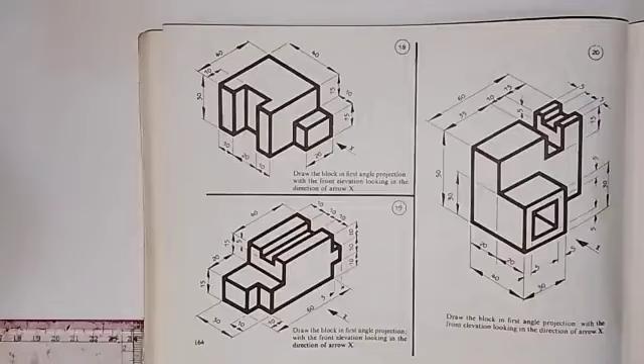Work on the construction of this isometric block. Though what we are asked to do here actually is to draw the orthographic views, I want us to look at how we can construct this isometric block as we can see it here, just to replicate it as it is given to us.

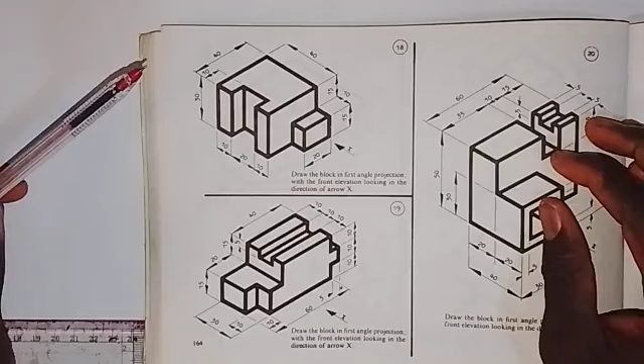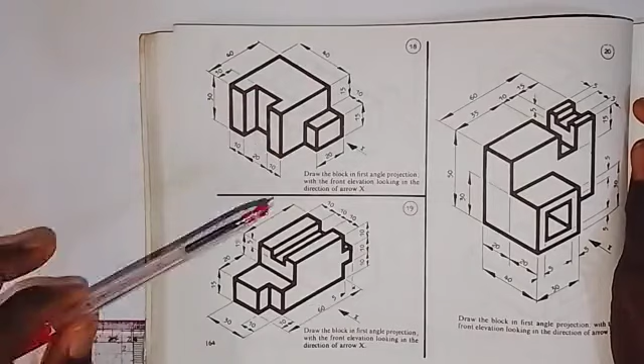So we have dimensions that we are to use, but what I'm going to do first is construct a block without this feature and without this feature. Then after that, I will bring out this feature, and I'll bring out this, and you're going to see how simple it is to construct this object as we see it here.

Now, so what I'm going to make use of from these dimensions here is this 40 millimeters as distance from here to here. I make use of this 40 millimeters as distance from here to here, and I will also make use of this height, distance from here to here, which is 30 millimeters.

So let's see how that can be done. What we are to do first is draw a short horizontal line. I will have it here like this. Okay, we have this. Then we are making use of our 30-degree set square, but I'm going to do something first by taking a point here, which I usually call the lowest point. So I'll call it point A.

Then with my 30-degree set square, I'm going to draw a line in this direction. From this point, I'll draw a line in this direction, and then I will come to this point and also draw a line in this direction. Okay, we have this. Then at this point, I'm going to draw a vertical line.

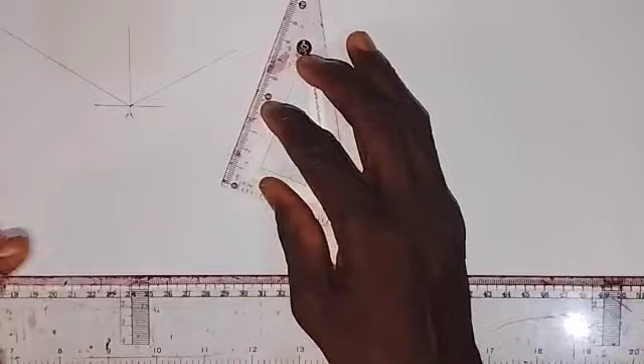So draw a vertical line like this, and I'm going to take the measurement as we have it there. So I'm going to take a measurement of 30 millimeters from point A up. So 30 millimeters up, this is 30 millimeters.

And then on this side from point A, I will take a measurement of 40 millimeters. So here is 40 millimeters here. Okay, then on this side from point A again, I will take a measurement of 40 millimeters from point A. So this is 40 millimeters.

So at this point, I'm going to erect a vertical line. I will erect a vertical line at this point. So here we have a vertical line up here, and then we come to this point here. We also erect a vertical line like this.

Okay, then setting my set square in this direction as we have it here, I'm going to draw a line from this point to where we have this 30 millimeters up from A. I will draw a line to touch this, and I will turn it this way and also draw a line from here to touch this line.

Then I will move to this point with the set square, and then I will draw a line in this direction. Then I will also turn the set square this way, and then I will draw the line from this point to touch this. Okay, so we have this block now.

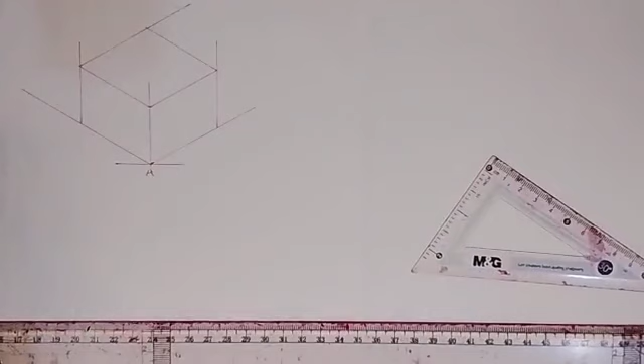So let's bring out the features that we have around this surface here. I mean this rectangle, this surface that we have here, and this, and then later we bring out this. So let's see how that can be done.

So what we are to do first, as we have here, we need to take note of the dimensions given to us. We have that from here to here is 10 millimeters, from here to here is 20, and from here to here is 10. So let's take that measurement.

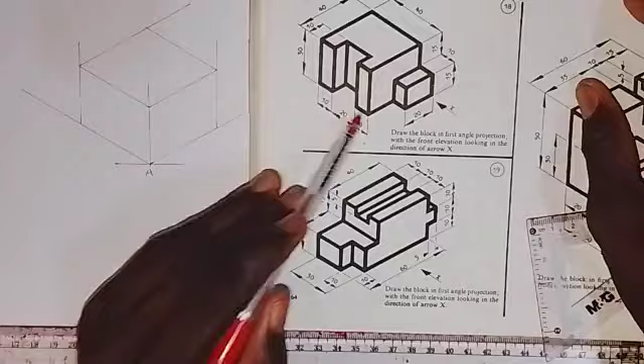So I'll come to this point here, take a measurement of 10 millimeters from here inward, and then I have 20, so the rest is 10 millimeters. So I'll come to this point here.

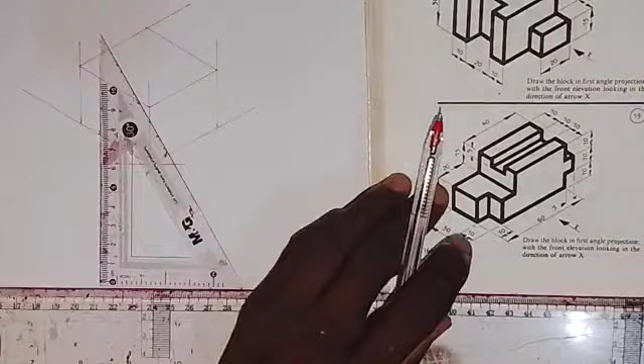So at this point, I'm going to erect a vertical line. This vertical line that we have here, I'm going to put it at this point. So we have it like this.

Okay, then we also have this vertical line that we have here. So I'll come to this point and erect this vertical line from this point up.

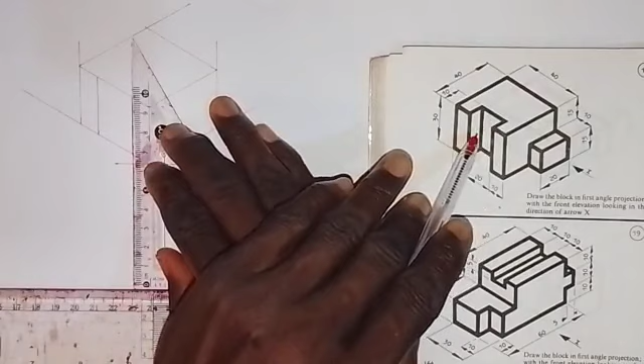Okay, so now we need to bring out what we see here. For us to bring out this rectangle and this surface here, there's something that we need to do. So we need to come up here with the set square, and then we are going to draw a line from this point inward like this, and then we come to this point.

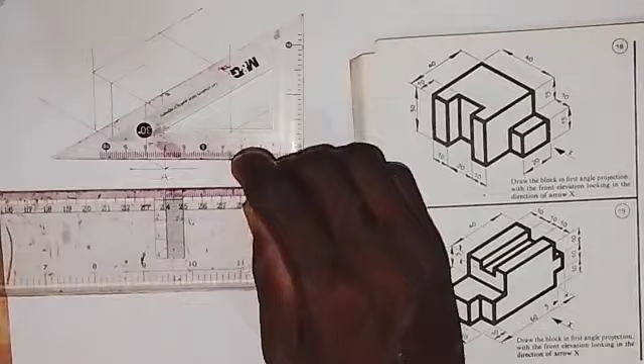We also draw a line inward, and then looking at what we have here, we are told that distance from here to here is 10 millimeters. So we have to take that measurement. I'll just come here and take a measurement of 10 millimeters from this point inward. This is 10 millimeters.

Okay, so at this point, I'm going to transfer this distance or this measurement. I'll transfer it to this side, so it goes like this. So we have this now.

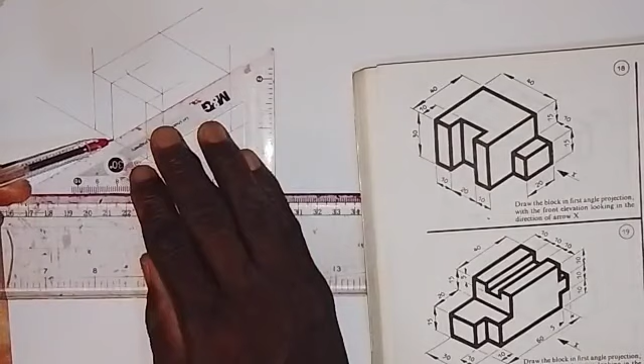So now I'll come down here at this point. This line that we see here, we draw it inward like this. Then from this point, with that 10 millimeters we just took, we draw a vertical line to touch this line, and then this line we have inward, we draw from this point to touch this line. So we have this now.

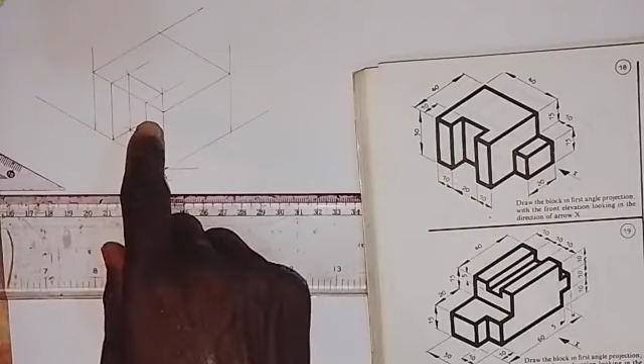So this feature we have here, you can see everything has been placed on this block. Now let's bring out this particular feature, this block we have here. The dimensions on it: from here to here is 20 millimeters, from here to here is 15, and from here to here is 10. So let's start with that.

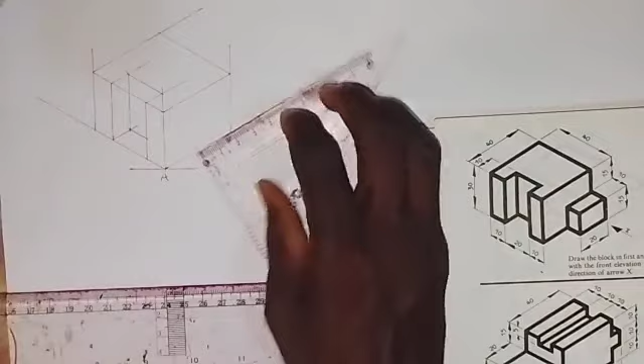By taking a measurement of 20 millimeters, from this point we take 20 millimeters in like this. Then at this point, we take 15 millimeters up. This is 15 millimeters here, so we have this will be 15 millimeters. At this point, I'm going to draw a vertical line.

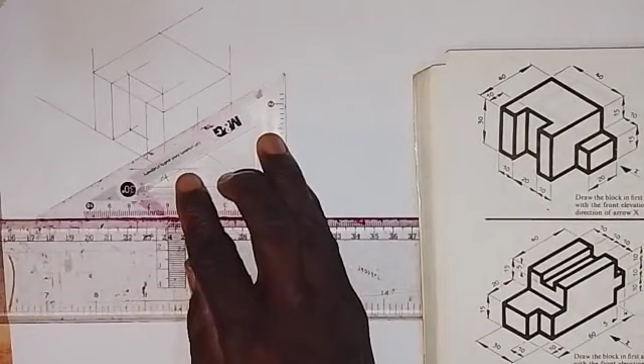At this point, we draw a vertical line up, and then we turn the set square this way and draw a line in this direction. Then we turn it this way, coming to this point here, and draw a line from here to touch this.

Then we come onto this line and take a measurement of 10 millimeters. From this point we take 10 millimeters, this is 10 millimeters. Then we set the set square this way and draw a line in this direction at this point. Coming to this point, I'm going to erect a vertical line.

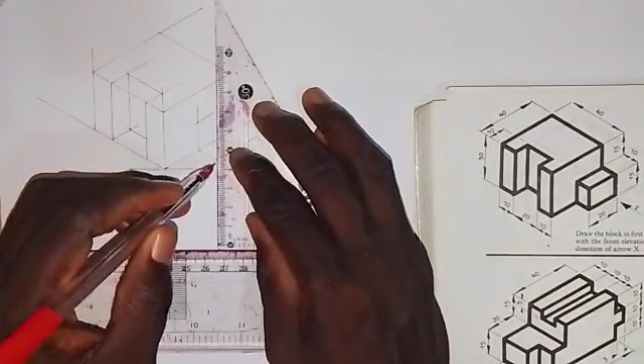So we have this. Then at this point, I'm going to draw a line from this point to touch this line like this, and then turn the set square this way to draw a line in this direction. Coming to this point, I'll draw a line to touch this line, then at this point draw a vertical line from this point to touch this line.

So you can see that the block has been produced here, as you can see. So now what we need to do is bring out the visible outlines and edges of this object to make it more clear.

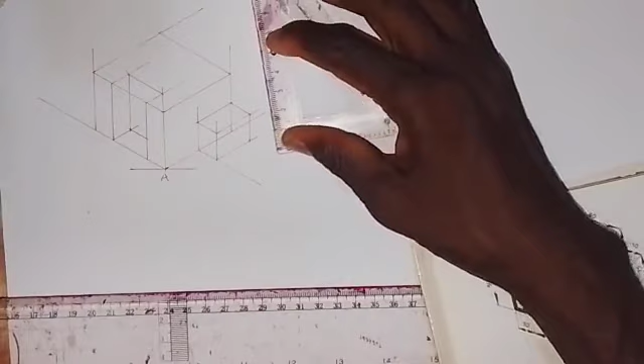With my black pen, which I use for my thick continuous line, I'm going to make this line a thick line, and then coming to this point, make this line thick from here to here, and this also thick from here to here. At this point we also have a vertical line, making this thick, and this point here, make this line thick from here down.

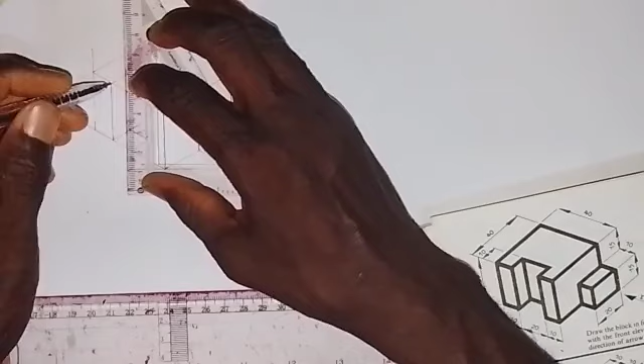At this point we also have a vertical line here, so make this line thick from here to here. This line we also make thick, and this line make thick from here down. So we have this, and now on this side let's work on this.

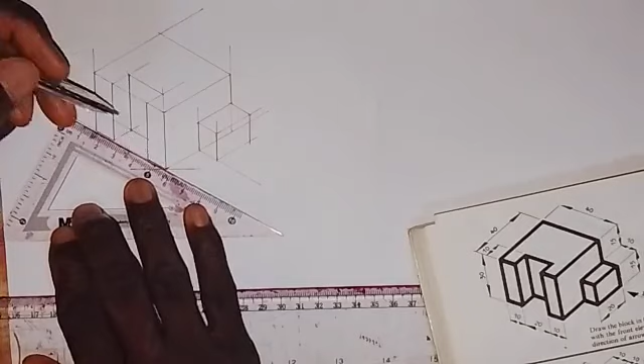Make this a thick line from here to here, this also a thick line from here to here, and this line also make it thick from here to here. These lines, so this line is thick, and this line also thick. This line we make thick from here to here, and this line we also have here, making this thick, and making this line also thick from here to here, then coming to this line, make it thick from here to here.

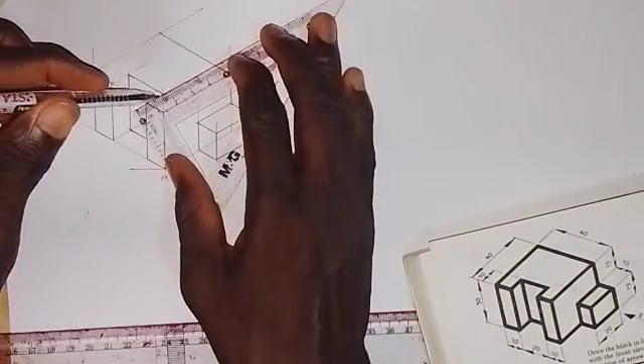Then this line make it thick from here to here, and on this side, let's make this line thick, and this line should be made thick. Then this line also make it thick from here to here, so make it thick from here to this end. Also this line, thick from here to here, this also thick, and there's a line down here I need to make thick. Then this line from here to here, make it thick.

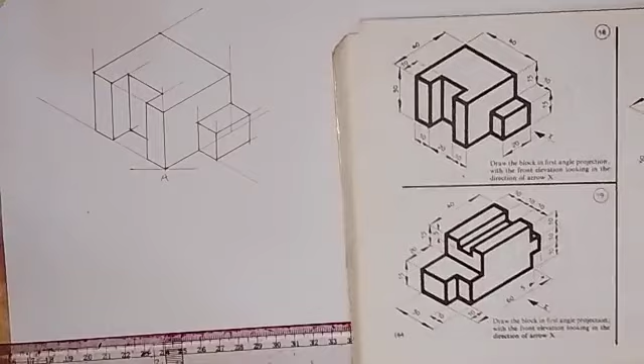So this is what we have. For this line we have this. All right, so all the visible outlines and edges have been brought out, as you can see the object looking exactly as we have given it here.